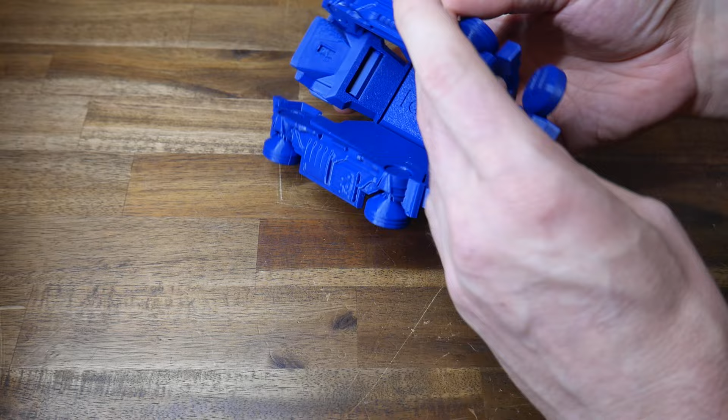Do you know about these amazing print-in-place models from FAB365? The ones that print unfolded and then transform magically into an object? Well, I managed to design my own, and today I'm going to show you how you can too.

Consider this video a new tutorial for my 3D Design for 3D Printing series, the playlist for which is linked below, but also partly a love letter to the designers from FAB365. I've featured their work in many of my videos, and it really is mesmerizing. I've made my own design that works in the same way. It's not as good as theirs, but I'd still like to share with you what I learned in doing so.

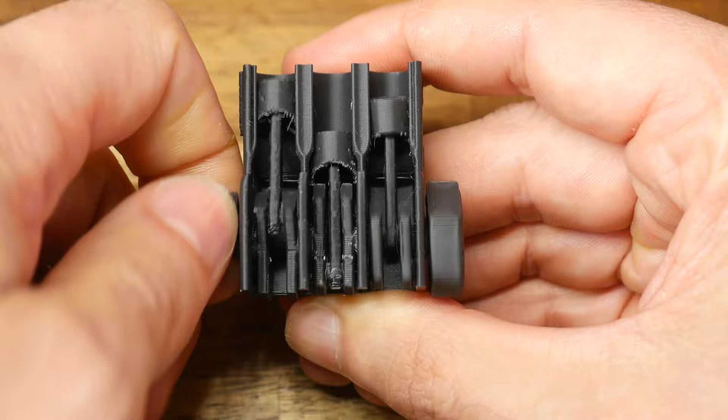I'm going to start this video by referencing another, where I recently covered really difficult prints that were really satisfying once you got them to work. And my favourite of those prints was the Pip-Bop 1 print-in-place robot by Extreme 3D Print.

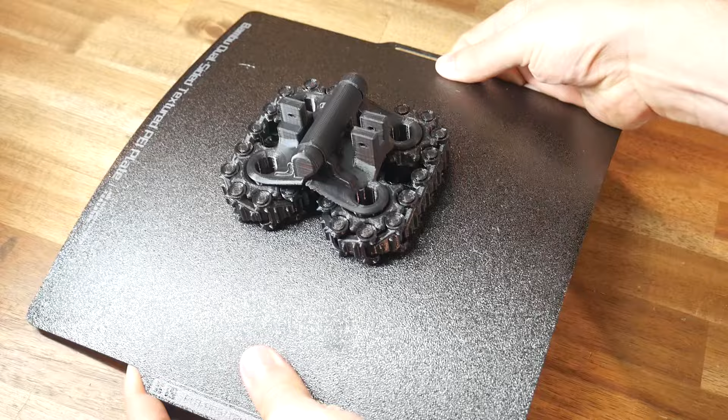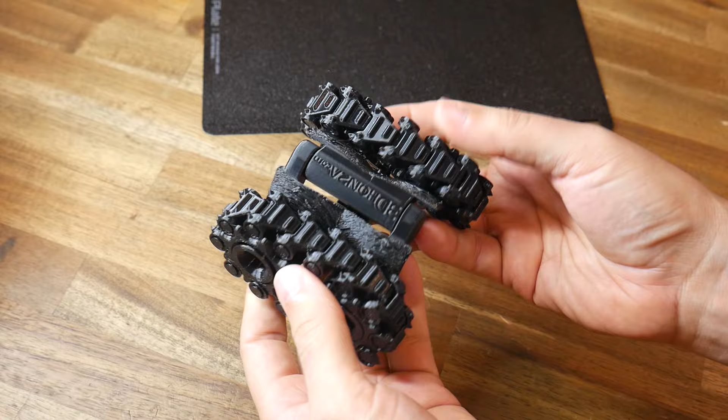This was completely print-in-place, with all parts pre-assembled on a single plate. Assuming you're successful, after the model is removed, you'll immediately notice that there's tank treads on either side that articulate to the point where they're completely functional. The two halves of the base then fold into the center, completing a tank configuration. A really awesome design, but there is no top available, so that's why I want to design my own.

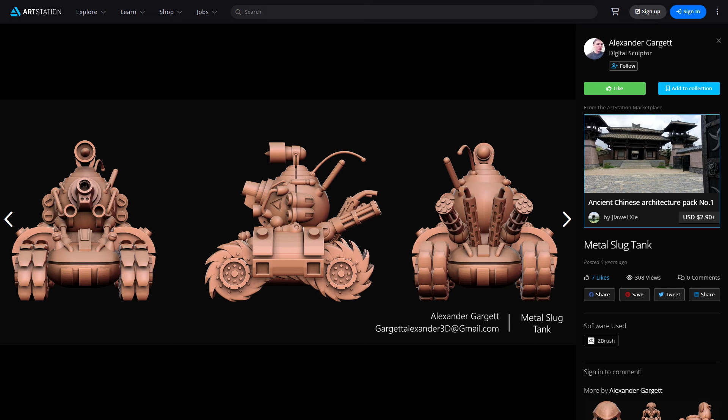The proportion of the tank tracks reminded me of a vehicle from the game Metal Slug, so I found these renders from Alexander Gargett to use as a reference. I won't be able to match it exactly, but there's cues I want to take from the design language, such as the stubby turret and little adornments hanging off pretty much every surface.

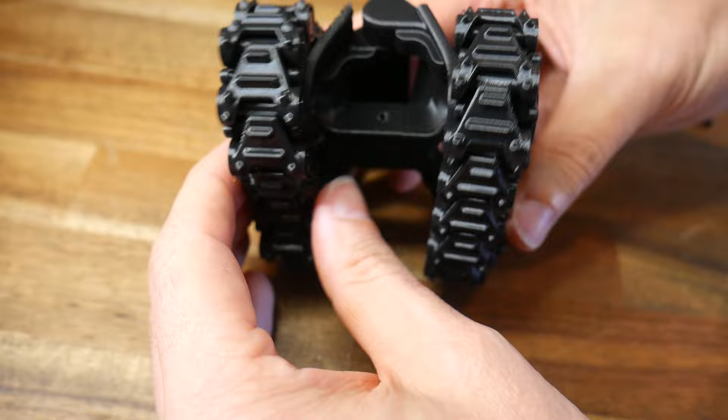In terms of adding on to the original model, there's not actually any decent mounting surfaces on the outside, but we do have this hole in the middle where you're meant to be able to put a bolt through to stop the two halves from unfolding. Therefore, the hole front and back will be my mounting targets.

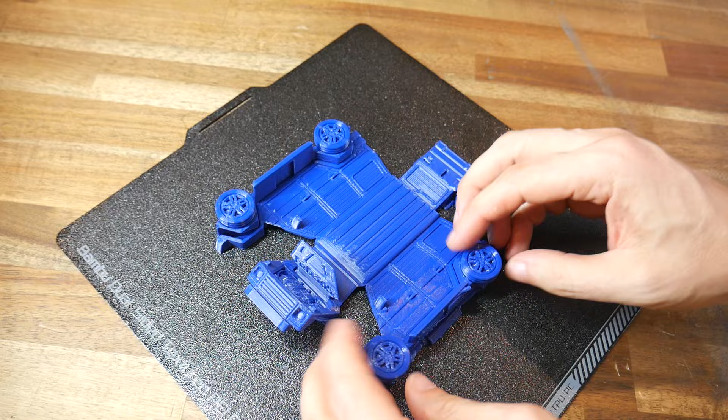Beyond that, my only other design goal is to have everything print from a single plate, including any movable parts, and then fold together to assemble.

The tank model was paid but came with many components, including the source CAD in 3 different formats. Since this is a paid model, I won't be sharing my CAD, and I'll be hiding the URL just in case. I started in Onshape by importing that CAD file, going for the IGES file.

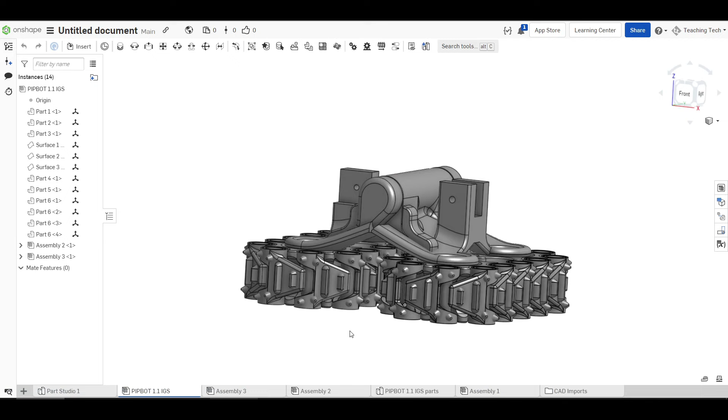In less than a minute, everything was imported successfully, and you'll notice some new tabs along the bottom. One is the complete assembly in printing configuration, there's 2 other assemblies with just the tank treads, and then a parts document with individual parts that make up those assemblies.

Our first job is to transform this model so it's sitting in its final assembled position, and then we can build onto that. I started by making groups by selecting all of the objects on one side. If we just hover over them, we can see what we should click and what we should ignore.

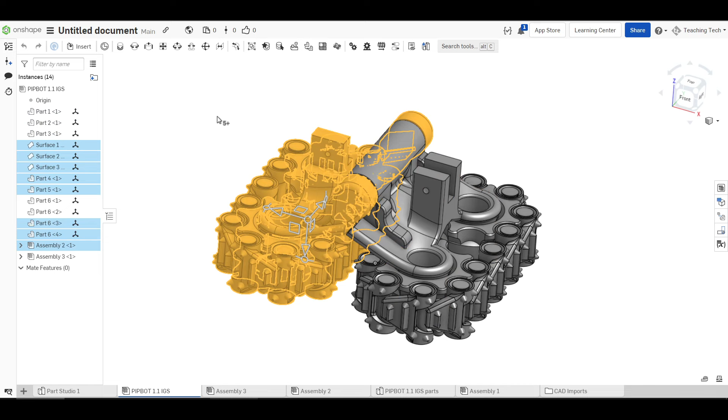With everything in one half selected, we could then come up and click the group button. We now repeat for everything on the other side, making a second group. With these groups, it should mean that if we click an object on one side, we can move and manipulate that, and everything will stay together.

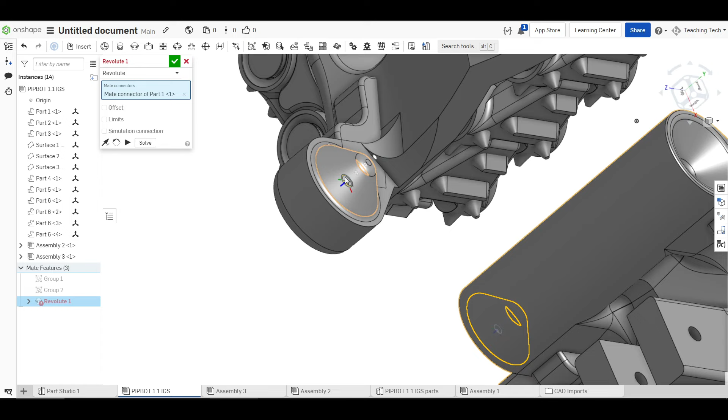But first, let's temporarily separate them and add in a mate to get them locked into the right position. I went for the center of the cone, and then the same position on the other side. You'll see that this side is flush, whereas this side has a gap, so let's turn on the offset and play with the value until it looks like it's roughly in the middle.

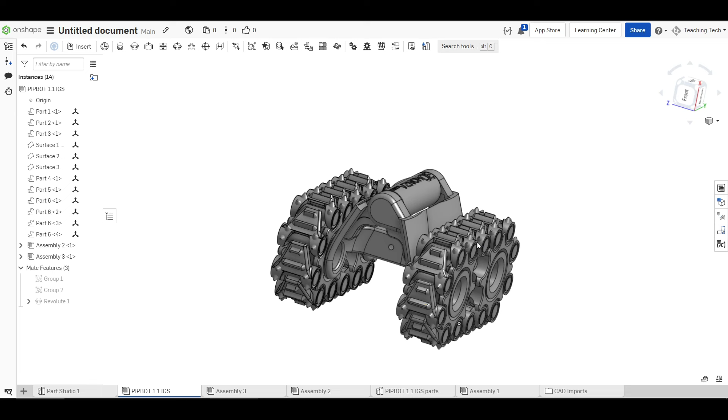Now with this first mate in place, when we click on one side, we should be able to rotate it, but keep it in the correct position, enter the exact value of 180 degrees, and finally our part is in the correct position we need to model around it. But this is an assembly, so we can't sketch or add any new parts here, but luckily Onshape has a trick for this.

If we come up to the top toolbar, we have a button that says Create Part Studio in Context. Because I'm mounting everything to one of these holes, I'm going to cancel this and quickly set up a Mate Connector there. We'll click on Mate Connector and then snap to the center of the hole, hit the tick, come back to our Context tool and select our Mate Connector.

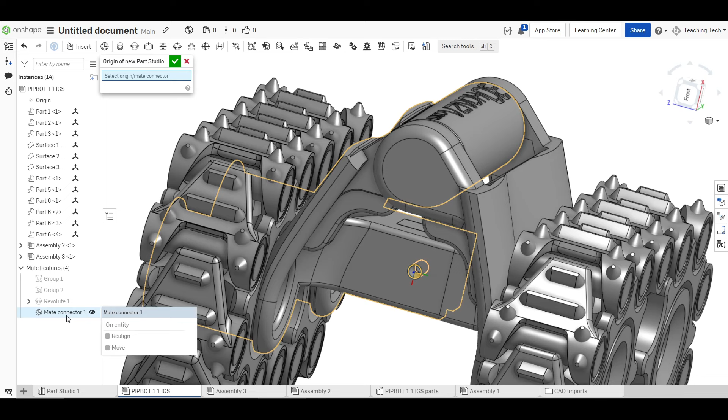Once we hit the tick, we can see that we have this dialog box up the top with a slider to change the transparency of the source assembly. But most importantly, we can now add sketches on the surfaces of the existing model, and in those sketches we can use the Use tool to project existing geometry and snap to it.

Because this is a print-in-place model, the first thing I did was create a variable called clearance that I set at a typical 0.3mm. After that, I created a 2D sketch that would drive most of the design. Down the bottom, it's got the outline of the top half of the tank's body, then we have a rotating section in the middle, and the turret which is going to rotate inside that.

You'll notice that for any of these gaps, it says 0.3mm, but if we double click it, we can see it's actually referencing our variable. That means that later on, I can come back and edit this variable, and every sketch, including this one that references a variable, will update automatically.

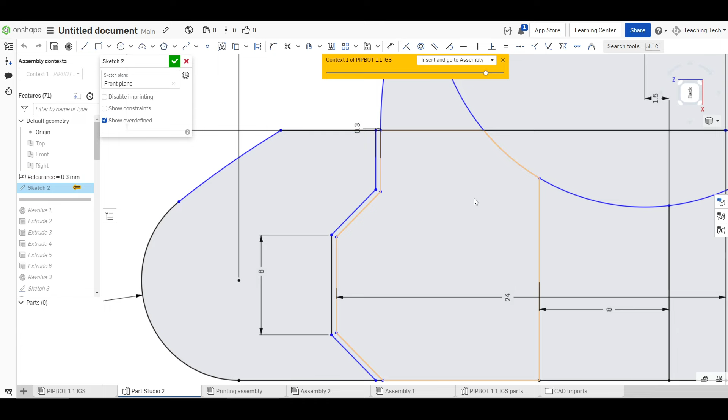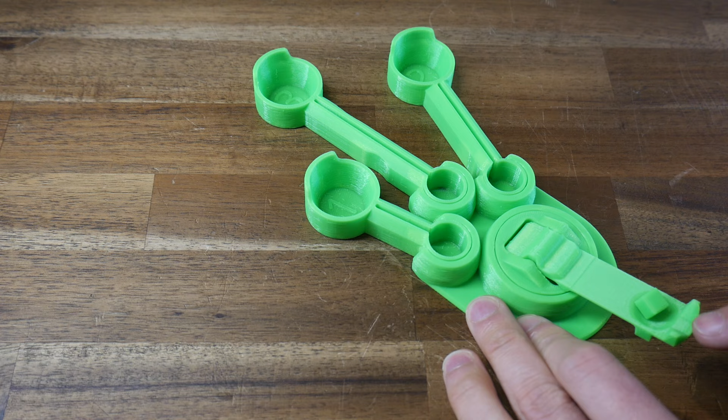For this center swiveling section, I use the same type of design as the print-in-place catapult that I produced just before Christmas last year. Using the revolve tool, I created the central part of the body, then some simple extrudes and extruded cuts to add the top section, before doing a simple extrude to create the second half of the body. Later on, when more details are refined, I use the same sketch to revolve and cut out a matching hollow in the tank body.

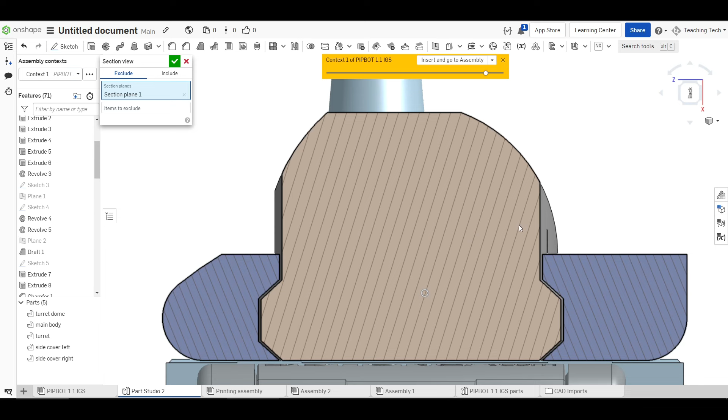A section view shows that there's equal clearance on either side. The tapered surfaces prevent the part from falling through the top or bottom, but still allow it to rotate inside the blue portion. Still using that same sketch, I cut away a section inside the grey half, and again using the same sketch, add in the makings of what will be the turret that can rotate up and down. And one last time with that original sketch, I revolve the tip of the turret on top.

If we look inside, we can see the base of the turret has a little section extending down to the ground just to avoid support material. And when this rotates down to the right, we have extra clearance on the inside so that our built-in support doesn't jam and prevent it from moving.

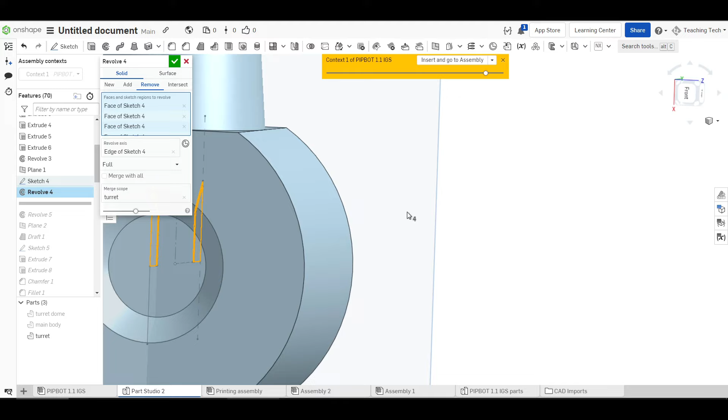Finally, I set up my second sketch to create the interface for the turret to rotate inside the upper body. The revolve tool was used twice, once for a cutout inside the turret, and then a second time to add matching bosses inside the upper half of the body, again with the same 0.3mm clearance.

Our next sketch is to set up the moving parts that will fold down and cover the tank tracks. I use this sketch to cut out a long portion along the edge, and then the same sketch to extrude back, filling in the middle. This leaves two handles where a part can rotate yet be printed in place.

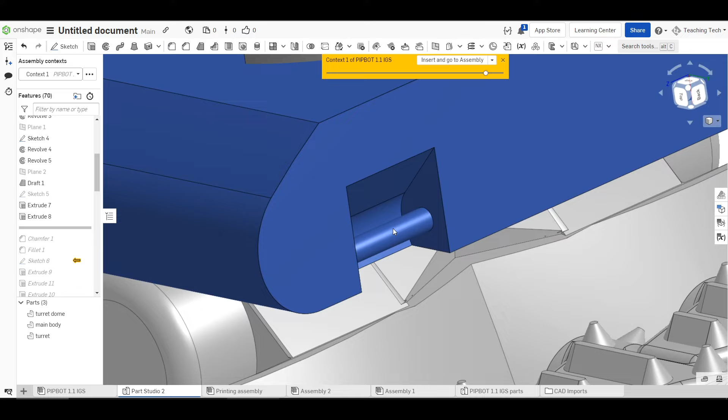Our next sketch is probably the most complicated, even though it looks simple, as I'm trying to cater for the position where the part will print, as well as the position where it will rotate to upon assembly. These two parts of geometry use equal relations to set their length to be the same. For instance, these two corresponding lines are matching. In this version, the part sits in the position that it will print, and the solid version shows the part where it will be assembled to.

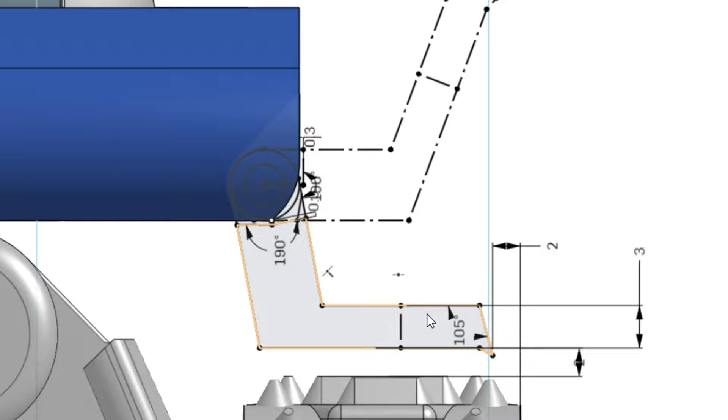After a couple of extrudes, we have our basic shape, and if we look inside with the section view, we can see we have clearance for the two parts to never touch, which should allow this side piece to rotate freely.

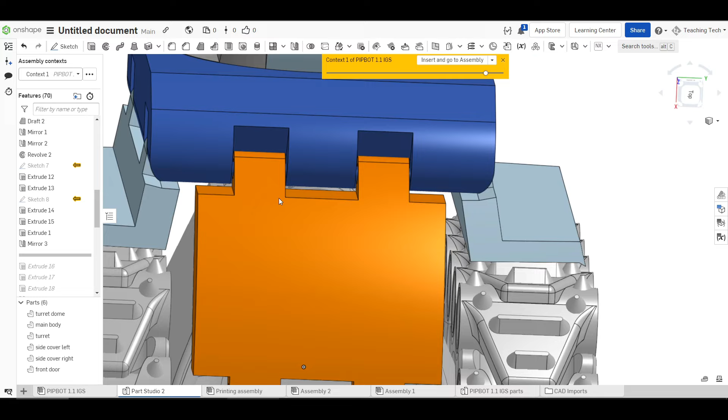We have a similar sketch and extrusions to create handles on the front and the rear, and then some simple sketches that put the next pieces of the bodywork in the position that I intend. Some more extrudes, keeping that 0.3mm gap between any moving parts, gets these front and back sections in position.

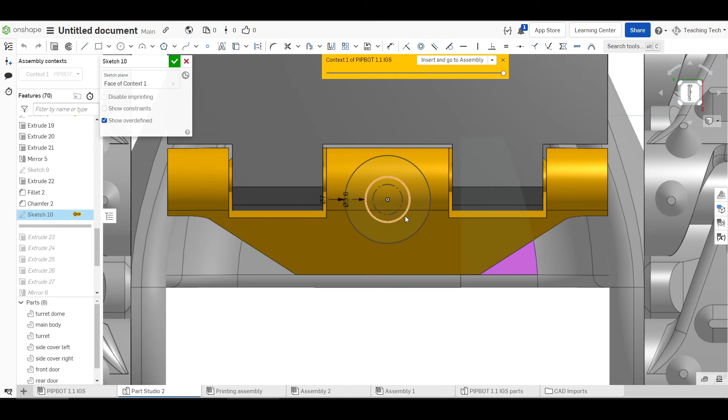The next sketch was also crucial, as it added the next two parts that would interface with our mounting hole in the middle. After getting the basic shape for this part, I then did some cutting out to make sure I would clear the existing model that I was attaching this to. Finally, I traced the mounting hole and created two clearance circles, which were extruded to create room for a bolt to enter. I then repeated all of this for the front, and that gave me all of my basic panels.

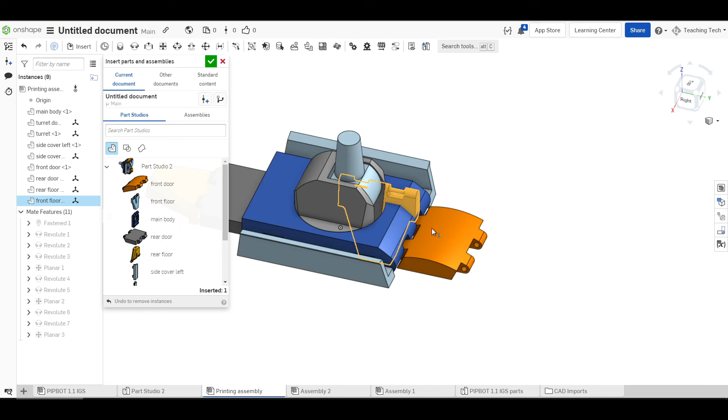Since we're designing for multiple positions at once, how do we verify that everything actually works? For me, the answer was in creating another assembly. As soon as I had finished a part, I would switch to this assembly and insert the part into its correct position. I would click on it and use the basic rotation tool to get the base orientation correct, and then apply mates, such as this revolute mate, to lock the parts together but still allow them the degree of freedom required to test the movement.

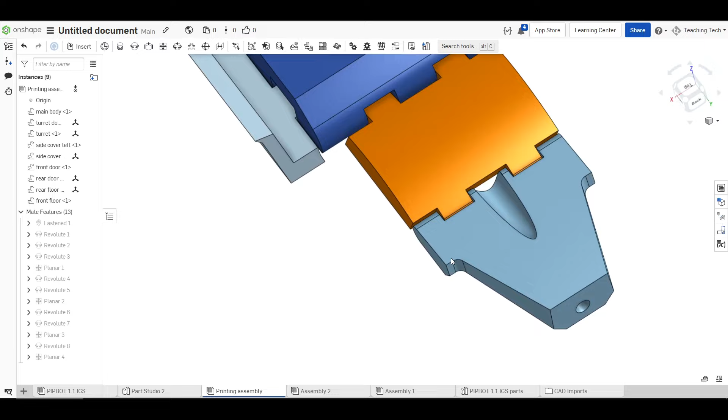To help ensure parts were perfectly flat to the bed, I would then use a planar mate to get the bottom of each part parallel. In the Part Studio, I can check for clearances in the folded position, but this assembly also allowed me to check for clearances in the unfolded printing position.

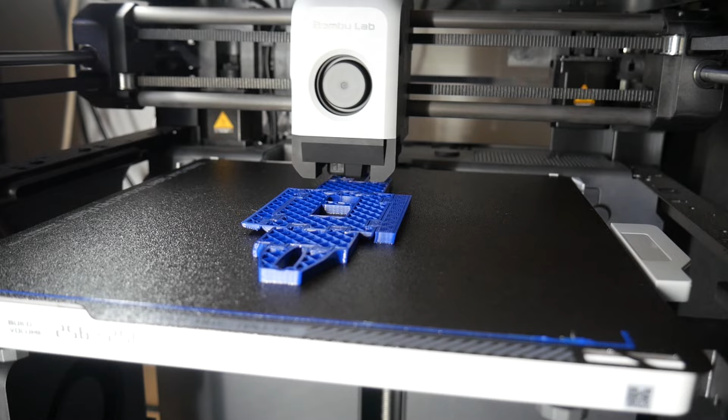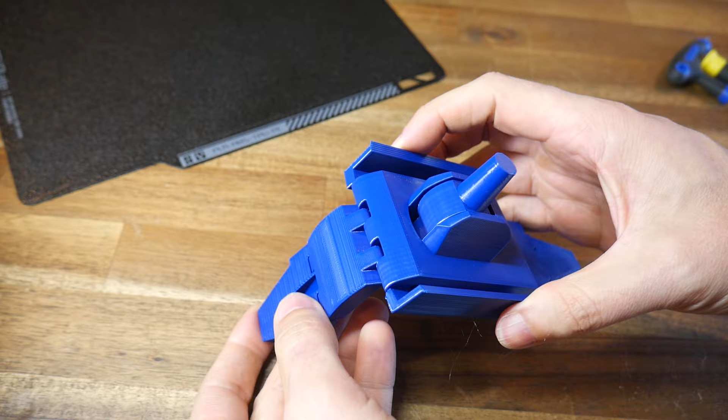With the design resolved to this simplistic state, I figured now was a good time to test if everything was working. I printed this one from Blue PETG on the Bambu Lab P1P. The printer did a great job, but I soon realized I'd made some mistakes. Upon removing the model from the build plate, I noticed that one of the sides was very rough underneath, as if it had peeled up off the bed. Not only this, but it was also locked in place and not moving like the rest of the parts.

Looking back at the printing assembly, it was obvious that I hadn't placed one of the sides flat on the ground, so at least that was an easy fix. I simply added another planar mate and this was job done. On top of the model, although the turret could move up and down, the part of the body that the turret was meant to rotate in seemed to be completely one piece, with only a faint line on the bottom telling you it was ever meant to be there.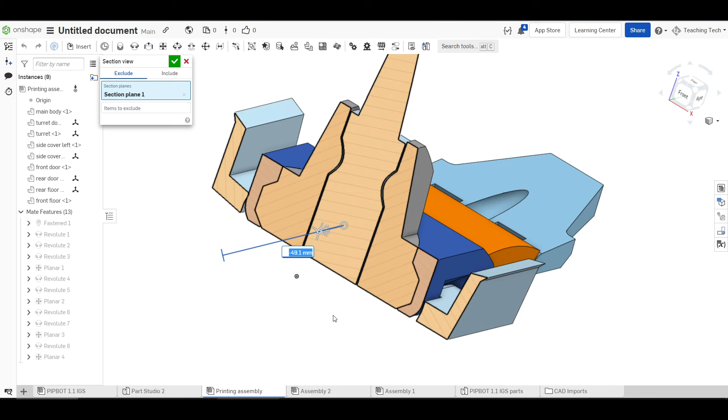So I made a section view of the design, something I should have done at the start, and as you can see, I made a mistake with one of my revolves and there's no clearance between the inner and outer parts. Going back to the Part Studio, I could see I had sketched the right clearance, but when I was doing the revolve, I simply missed clicking on the air gap in between the parts, so this was also a quick fix.

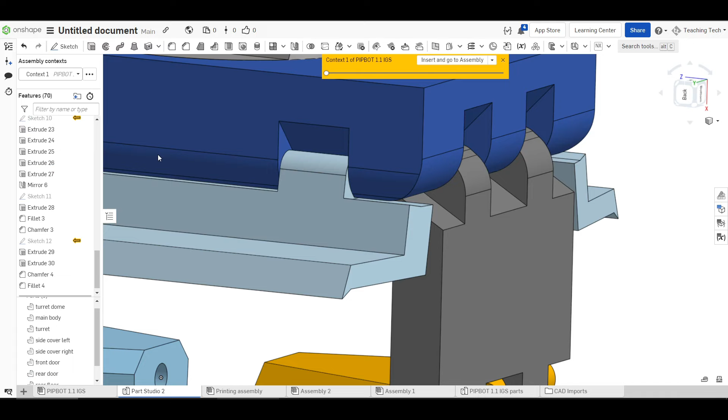Because these problems come in threes, at the back of the tank, one of the folding hinges was also fused and wouldn't rotate. This was strange because the front was designed in the same way and worked flawlessly. It turns out this one was just a simple design mistake, where these two corners intersected the main body when the model was unfolded in its flat position. After a little bit of trial and error, I found a radius to add to the corners that would give sufficient clearance and hopefully make the folding parts completely functional.

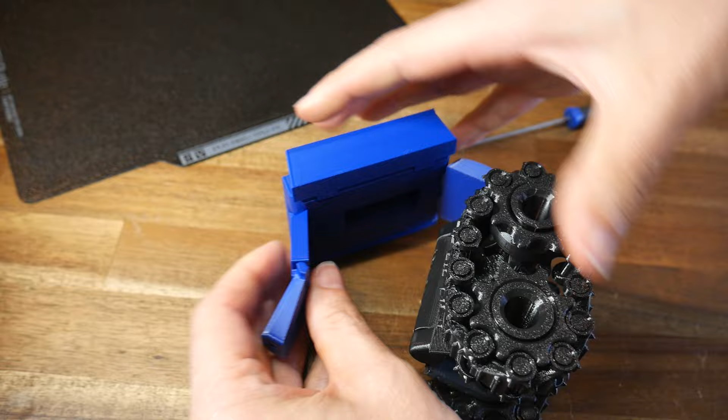I then spent some time doing what I should have done at the start, examining the model with section views to ensure there were gaps where appropriate. With some force, I did manage to snap free the back tailgate, and that allowed me to assemble the model using two M3x12 bolts that come from the front and rear. With both of these in place, I could then inspect the model and test the rest of the functions.

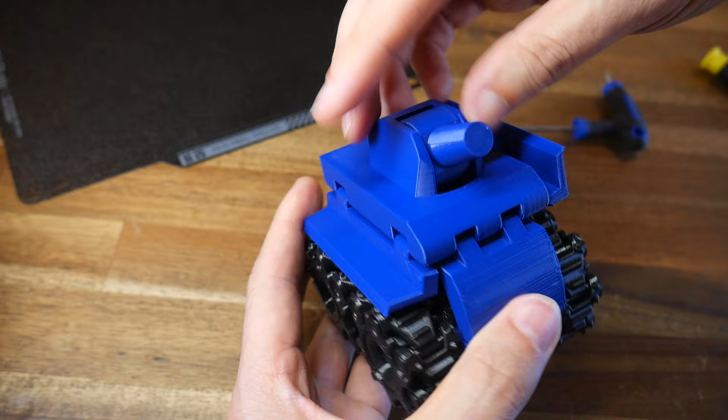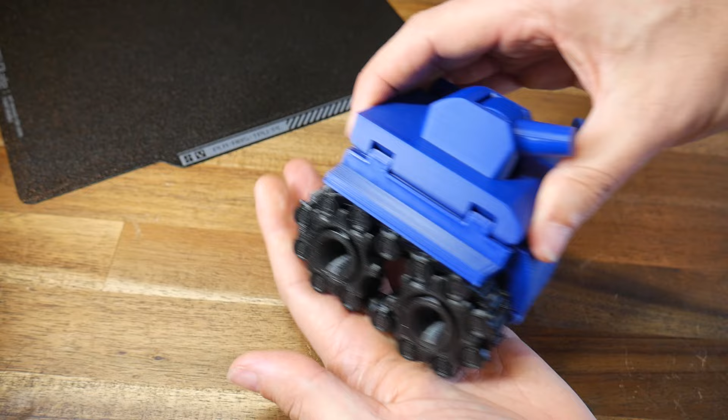The turret had a tight spot where that bottom support post was just fouling on the inside. I fixed this by adding clearance chamfers on the underside of that piece. I also decided that I needed a little bit more room between the tank tracks and the body of the tank. As it stood, things were a little bit too close in some areas. So I went back to the part studio and narrowed the width of the front and rear plates, and I also gave myself a bit more separation on the side fold down sections.

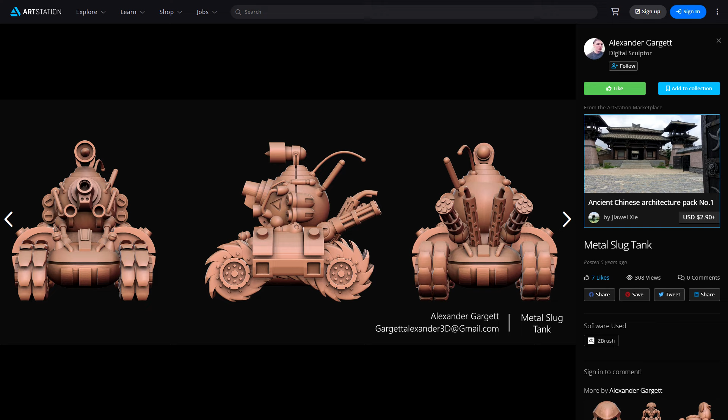After another thorough inspection using section views in the printing assembly, I was confident that my base was ready to go. With the basic shape tested and now theoretically working, I could go back and add some embellishments. So back to my reference art, and I wasn't trying to copy it exactly, just to take design cues. And after a few hours, this is where I ended up.

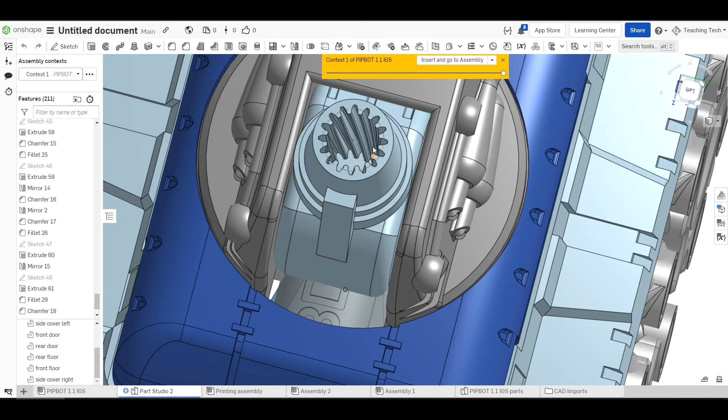Honestly, I was just adding random shapes a lot of the time, but I did take some direct design cues, such as the angled exhaust out the back, spheres with joining pipes and bulges on the outer sections, adding in splits in the bodywork with joining pieces, with steps and a support to the turret, including some nice rifling on the inside. To achieve this, I created a helical gear with a boolean cut into the turret.

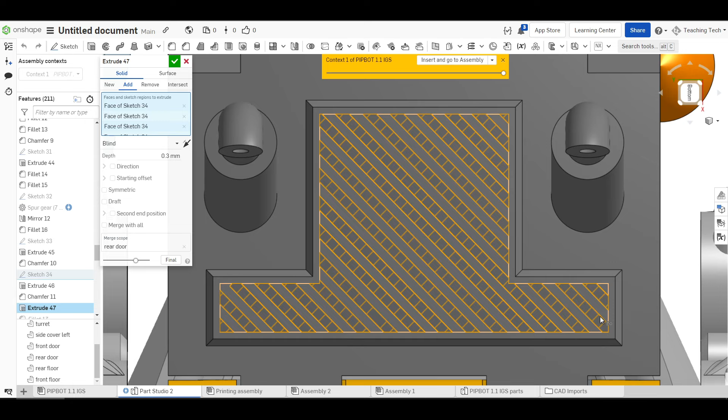The sketches for a lot of these features are quite messy, with outlines and simple patterns, and then me manually clicking all of the ones I wanted to emboss, and then extruding shallow cuts into the surface. The messiest sketch is the one for the heat vent on the back, and with so many lines I had to individually click each of these segments to select what I wanted to become 3D geometry. The end result is simple but should add a lot of detail.

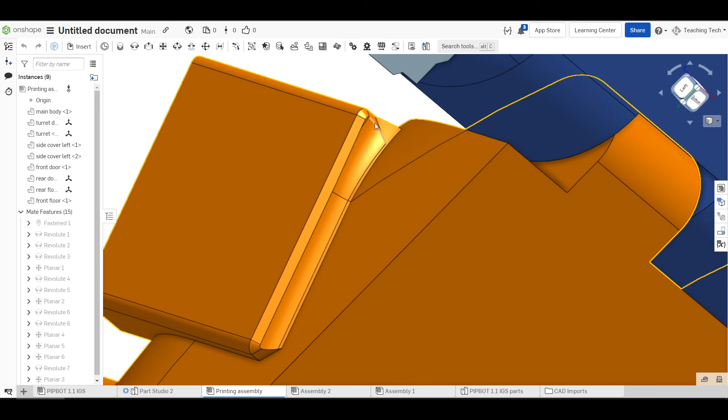A lot of these features are just about making the surface look busy and not blank like it was before. Honestly, I don't have much knowledge of tanks, but to me it looks much better than it did earlier. With these new features in place, I again had to check the assembly to make sure nothing fouled, and also with these moving parts, it's important to check that they'll print without support material. You can see I've added little fillets and chamfers to stop what would have otherwise been an unsupported overhang the whole way along this edge.

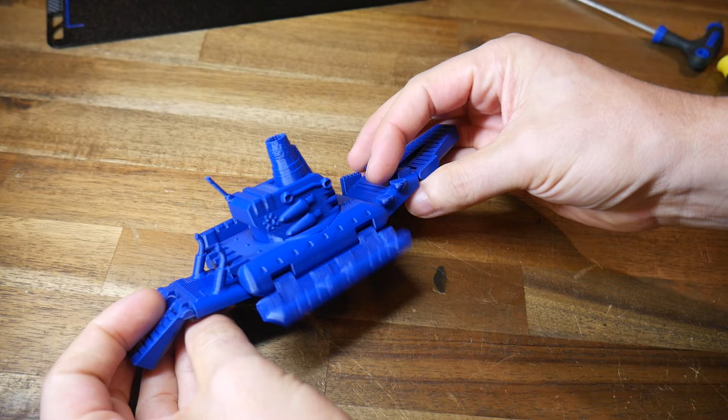Everything was checked, so it was time for the final print. The new model was printed in the same conditions as before, and this time when I flexed it off the bed, everything moved as you would expect. The simplified version that I printed earlier had successfully allowed me to overcome any issues that I had created. I didn't test it on the first model, so it was good that the turret assembly rotated freely too.

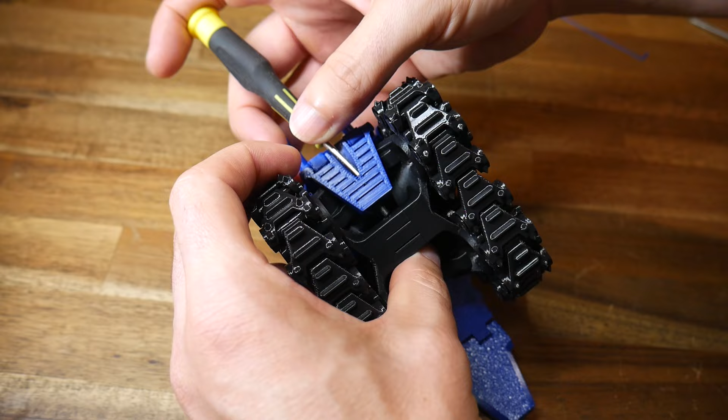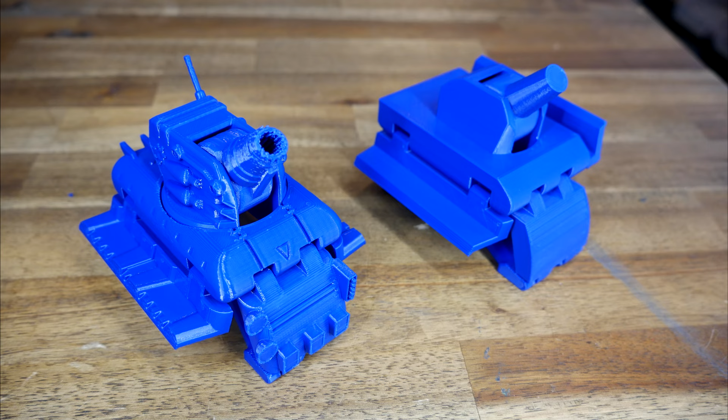By this stage I was quite excited about the final assembly, folding the tank body around the chassis, and then using two M3x12 bolts to hold the separate sections together. And with that, my FAB365 style print in place model was complete. I'm feeling a tremendous sense of achievement from this, and I also feel that the printed final version looks better than it did in CAD on the screen. I'm claiming this one as a win, especially when you compare the final design to the earlier simple prototype.

The designers at FAB365 are still the masters. There is absolutely zero doubt of that. But maybe the design steps in this video might let the rest of us take our first steps in the right direction.